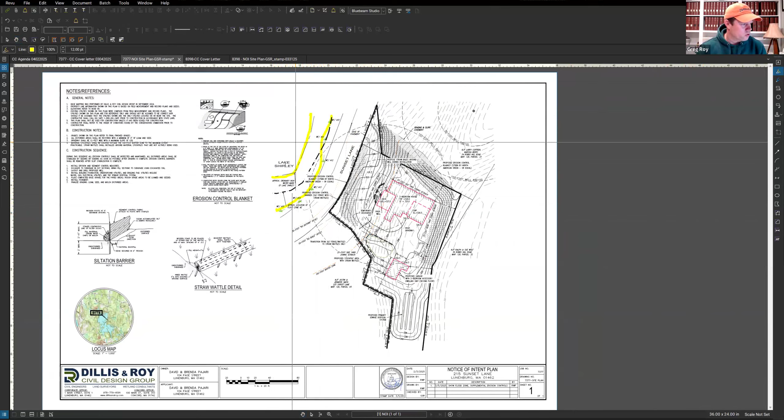Sunset Lane, of course, on this plan, is right in this area here, and the lake is on the left side of this page. So we have a wetland system flagged right in this area, and Lake Shirley is just past it over here. So that's the water, and then we have a bordering vegetated wetland that borders on the edge of the lake in this case.

The 30-foot no disturbance zone is located within the limits of the pavement, so there is no proposed work within that zone. The limit of the 50-foot no build zone is right here. So we have a very limited amount of work between the edge of the pavement and the 50-foot no build zone that's proposed. But essentially all of the work for this application is outside of the 50-foot no structure zone.

The limit of the 100-foot buffer zone is right in this location here. So the front portion of the site, approximately 50 feet of the site, is located within the 100-foot buffer zone. As you can see, most of the proposed structure, shown in red, is outside of the buffer. We do clip it with the front part of the house, a very small part of the front, and then a portion of the proposed deck. There's an accessory structure here shown, a garage structure, that's completely outside of the 100-foot buffer zone.

Essentially, this site needs to be lowered on the upper side where the proposed structures are going to be. So we're proposing a driveway that enters from Sunset Lane in this location right here, and then sort of skirts the slope so that we can get enough length required to keep the grade below the 12% maximum required by the town of Lunenburg's driveway regulations. Effectively, that is what's driving the grading at the site.

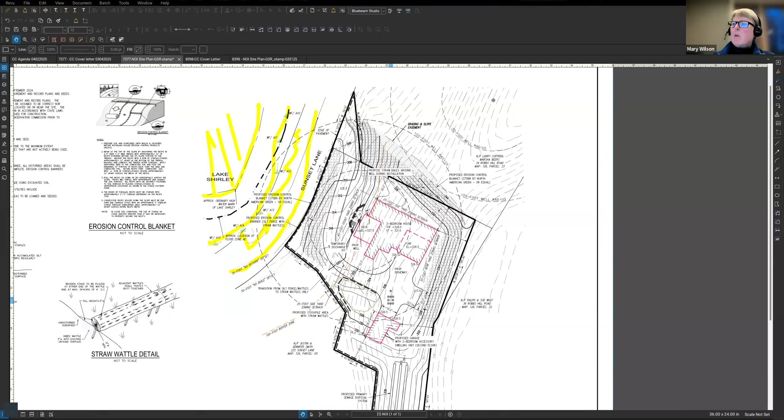It looks like maybe it's not. So, all of our notices of intent have figures in the back, and one of those figures is across the street, across from the abutting parcel, but not this parcel. I'm not sure if you're seeing the screen. Are you seeing it now? Yeah, with the notice of intent?

Yeah, so this is the natural heritage map. The site is in blue, and the yellow is the limit of the natural heritage area. So we are in fact outside of it. Okay.

Very good. I think there were two comments. I thought you were going to ask about the DEP, whether a DEP number had been issued, and in fact it has. The first comment was whether there were two applicants on the filing. There isn't. We've actually already put the A&R plan on record, so that land swap is already behind us. So there is in fact just one applicant. We believe that was proper.

And then the second comment was that they had a question about the floodplain. We have added that to the plans that we revised, on or about March 3rd, and showed it. It's on the opposite side of the street. There is no floodplain on the side of the street where the work will be done. So there's no work within bordering land subject to flooding.

Okay. And then with the grades, after this is completed, how will the property keep water from just sheeting off and into the road? Well, one thing I failed to mention, we are going to be restoring this with stake-down straw matting, so a little bit more beefy slope stabilization than we would normally do. But right now the entire property runs towards the road as it is. The current property is all covered with trees and understory, and this is gonna take a lot of that down, if not all of it. So if there's a concern with that, we could certainly look to put some dry wells in or something.

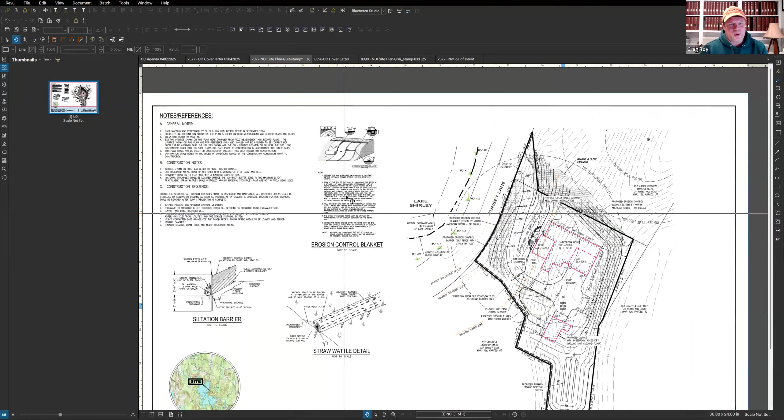We first of all did a more beefy slope stabilization specification on the plan than we normally would. We do have a rather basic construction sequence, but the intention would be to get those things stabilized as soon as they're built, and not let them sit there exposed. The good news is it's not a glacial till material here, it's a pretty granular sand.

So I'm not saying you're not going to get any washing, but you're not going to get the fines that come out of a glacial till material like you would in that type of material. So the intention would be to get those excavated and shaped and stabilized as fast as possible.

And we can memorialize that. Are the erosion mats impregnated with seed, or are you going to seed and then put the erosion mats over the top? Typically we would seed and then roll the mats and stake them down.

So you're going to loam over the sandy fill that's there? Right. Loam, seed, and then instead of mulch, in this case it would be the rolled, staked-down straw matting.

Okay, I guess I would recommend that we have a sequence where the slopes are loamed, seeded, and erosion matting put down as soon as the grade has been finalized and cut in, and the driveway is in use for construction.

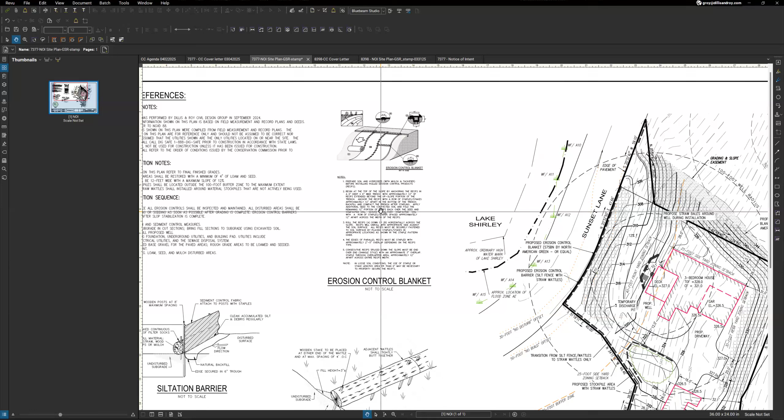So add the tracking strip at the end of the driveway and sequence that the slopes are loam seeded and the erosion protections put down as soon as the grade is done. That would be it, Madam Chair, at this point. Thank you very much, very good suggestions there.

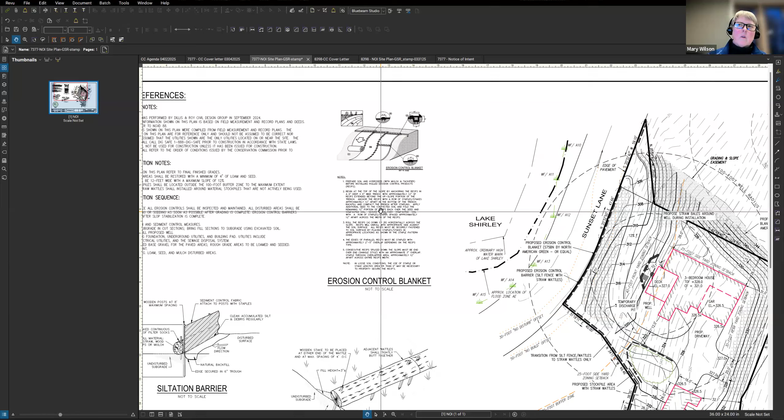Greg, I did ask if you could look at mitigating some mitigations for runoff. So would you be willing to continue to the next meeting? Would that give you enough time to go look at that for us? Yeah, that's plenty of time.

We can definitely, so I heard runoff mitigation, a tracking strip for vehicle tracking during construction, and updated construction sequencing to memorialize slope stabilization immediately after it's constructed. That's what I heard as well. Good news is you tape these meetings, so it's a lifesaver sometimes for us consultants to go back and look. We'll get those done.

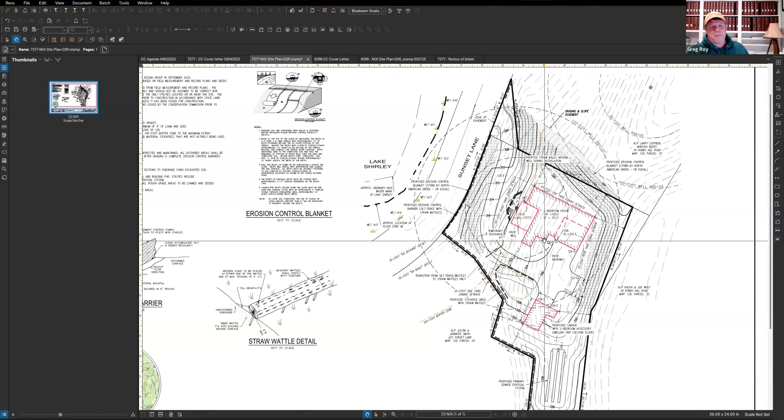There's a general condition that you folks have been putting in your orders relative to stormwater management and the preparation of a SWPP, compliance with the EPA NPDES permitting. The way it's phrased, it does not have the words 'if applicable,' it just says it has to be submitted. That's problematic on small sites like this where EPA SWPPs do not come into play. EPA SWPPs are only triggered if you have greater than 43,560 square feet, or greater than an acre, of land disturbance.

So I just keep that in mind for this. I feel like it's your purview to put whatever condition you want in a decision, but it seems to me like you need to put an 'if applicable' caveat on there, because there's projects we've run into recently where it's a small project that doesn't rise to the level of EPA SWPP permitting.

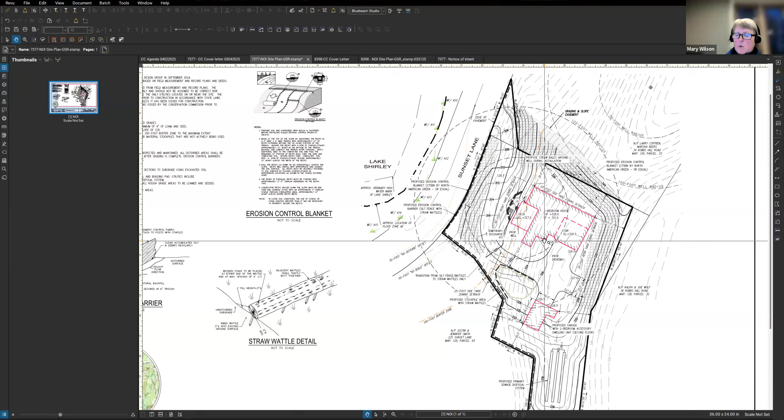I'll make a note of it, Greg. Thanks for the suggestion. It's always welcome. As you say, it's up to the commission about whether we take it on board or not, but I appreciate you offering it. There's always room to improve it everywhere, right?

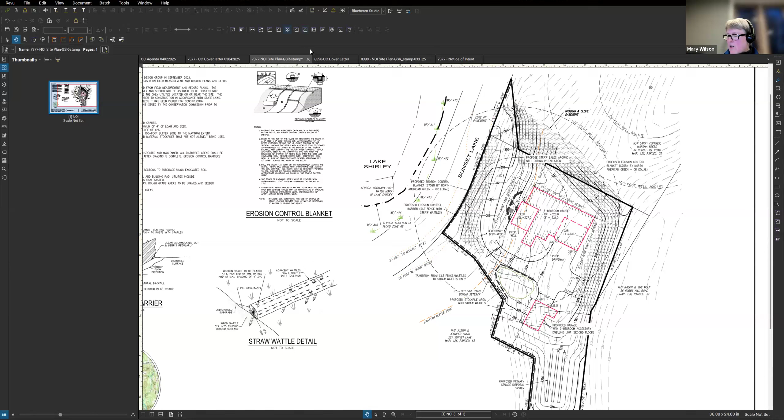So thank you. All right, now I'm looking for a motion to continue to April 16th. So moved. Second. Okay, I heard Rich and then I heard Mike as a second. Did I get that right? Sounds good. Okay, roll call vote.

Jenny, Aye. Rich, Aye. Jeff? Oh, I almost heard Jeff, but I don't think I did. Sorry about that, that's an aye. Thank you, Jeff. Mike, Aye. Chris, Aye. Pete, Aye. All right, thank you. See this one again on April 16th.

Moving along. Pursuant to Mass General Law, Chapter 131, Section 40 as amended in the Town of Lunenburg Wetlands Protection and Municipal Bylaws, a public hearing on a notice of intent by Proctor Mass Ave Realty Trust for the extension of an existing paved driveway, the construction of a single-family dwelling, and the removal of vegetation within the 100, 50, and 30-foot wetland buffer at 1523 Mass Ave.

And do we have the applicant and/or the representative here with us tonight? Madam Chair, Greg Roy with Dillis & Roy. I'm representing the applicant this evening, which is the Proctor family. Dan Proctor, I think, is on the call, perhaps Gene as well. Officially, it's Proctor Mass Ave Realty Trust.

This property is located on Mass Ave, on the northerly side of Mass Ave, and it's directly adjacent to the large wetland system out back, within the Cowdery conservation area. So if you familiarize yourself, when you come around the big bend coming out of town, you go down that low point and cross the big wetland area. Just before that, on the left, is the land area we're talking about.

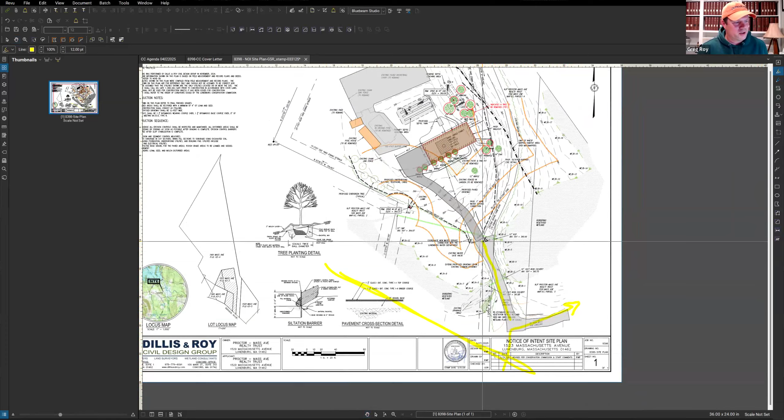So Mass Ave is actually down here off the page, a little bit further. The driveway comes in here, splits off to the existing house that Dan and Jean live in. There's an existing driveway, shown in light gray, that's constructed today. It opens up into a field area on the lot we're talking about, where there's an existing pool, basketball court, and in front of that is where we're proposing to build and construct the new house.

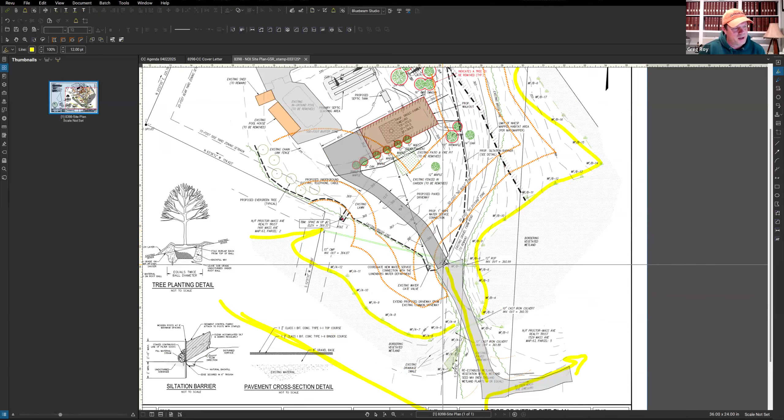So there are wetland resource areas on a couple of sides here, and on the other side here as well. The orange lines represent the 30, 50, and 100-foot buffer zones on the site. So with the exception of the connection of the driveway to the existing driveway, which is slightly within the 30-foot no-touch zone, there's no work proposed within the 30-foot no-touch zone.

Again, the only way to access it is through that point. The rest of the driveway from this point on is outside of the 50-foot no-touch zone or no-structure zone, and the house is almost completely out of the buffer zone, certainly outside of the 50-foot zone.

The only other exception I wanted to note is that, as I mentioned, there was an existing house here. So there's a water stub that comes in, and an existing water valve right in this location. We're proposing to connect the water line from that point, so that would be our utility connection. You can see we have the erosion control barrier run right around the limits of that, so we can accommodate that connection.

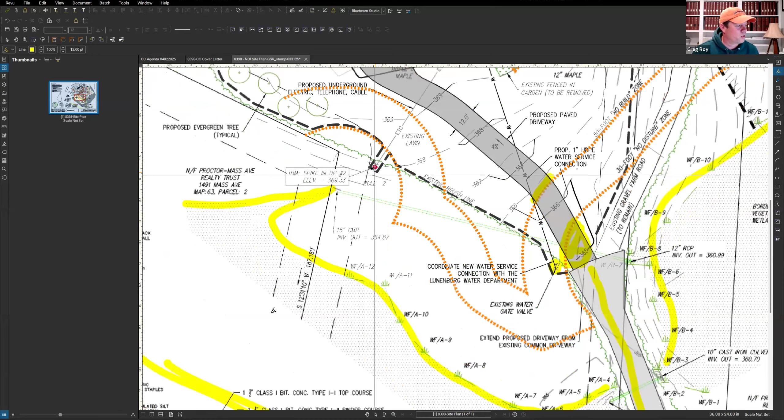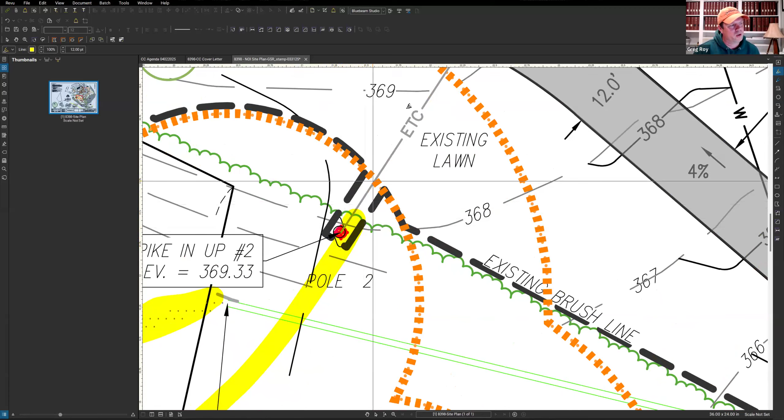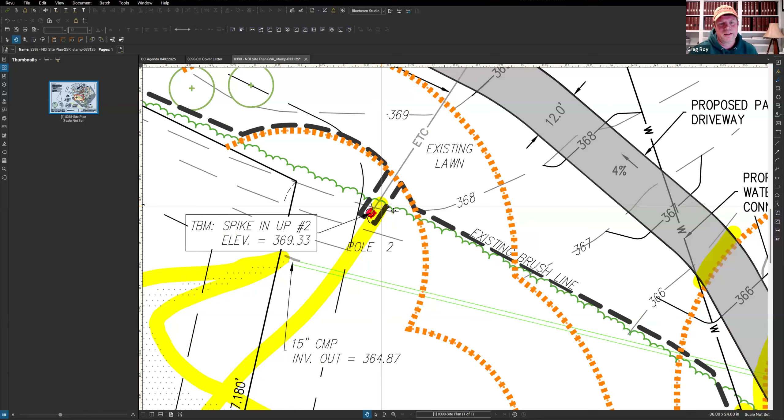And in this location, you can see this red dot - that's an existing utility pole. The power lines come cross country from Mass Ave, kind of like this, to this pole. We will need to connect to that pole, and the intention is to do that underground. So there will be a short period of excavation needed here to get from the pole into the site for the permanent power connection. That is within the 30-foot buffer zone, but it looks a little deceiving here - that pole is right at the edge of the woods line. There's no tree removal required for that connection. It's completely out in the limit of the lawn area.

There were some comments that we got from both the site walk. I attended a site walk with Sophie, I think a week ago, and then I think Ryan was on site with a few members of the commission on Saturday. Two things came as a result of that.

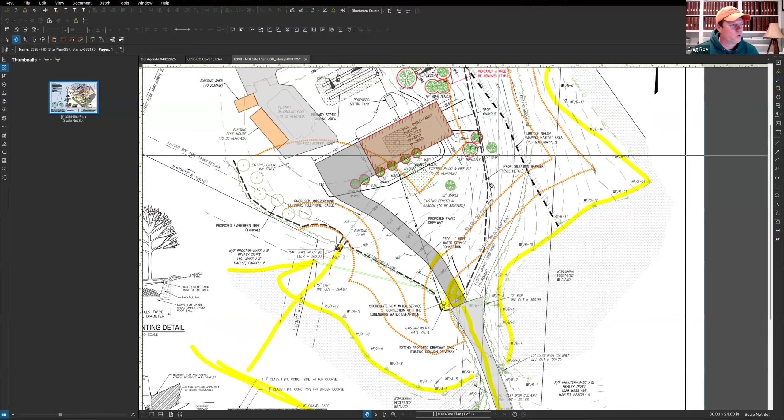One was that we had not shown all of the trees that were going to be removed on the property. We had shown the ones in the back here, most of which are actually outside of the buffer zone, but there's two down here that are within the 100-foot. We didn't show the ones along the edge of the fence that encloses the pool - there's about 6 trees right in this area, along the fence, that are going to have to come down because they're in the location of where the house and driveway are proposed.

All of those trees are outside of the 50-foot. 3 of them are outside of the 100-foot. So, we wanted to be clear and show those on there.

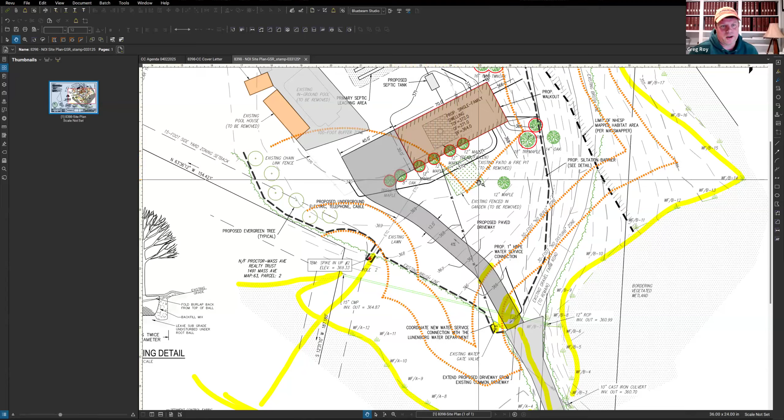The only other thing that came to light was that there's a pocket of wetlands down here that have been disturbed. This is essentially, I think historically, a drainage swale that was built a long time ago that drains - takes drainage from Mass Ave - and then drains to a culvert in here. Over time, the culvert gets kind of gummed up and needs maintenance. So I think the disturbance here was related to that.

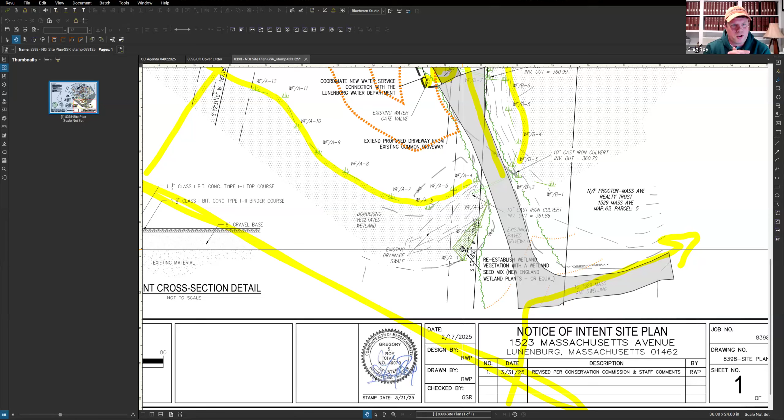And the applicant has committed to restoring that area. I think that was discussed on site. We have memorialized that on this plan, where we will dress that area up and overseed that with a wetland seed mix. We also issued a letter to that effect too. So those were the 2 items.

Septic system is going in the back of the house, outside of the buffer zone, so no issues with that. I think that's all for this one. We did receive a DEP file number on this one as well, and there were no comments from DEP on this one. So I think that is all I wanted to mention.

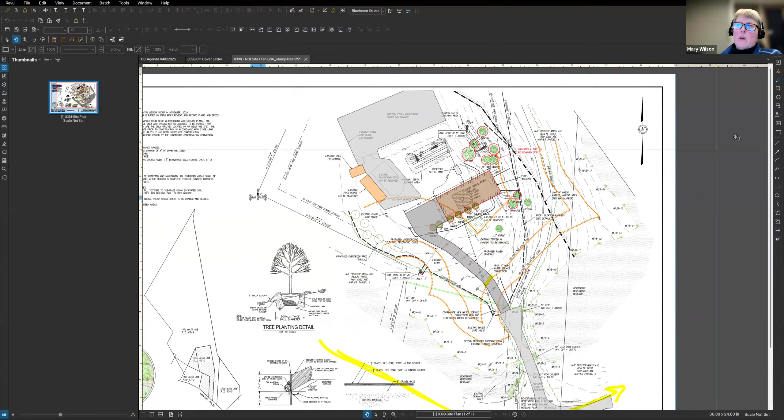Thank you, Greg. So there is NHESP protected area on this, not in any of the areas where you're planning to do construction. But my understanding is that if it touches the parcel that you're doing work with, that's correct - you have to send the letter to Mass NHESP and get them to agree that you're not altering or impacting that area.

Which hopefully would be something really straightforward to send to them, and they would send you back a letter saying, oh no, this doesn't apply. So typically we would not do that if we're outside the polygon.

We're either in it or out. So just so everybody knows, the limit of the natural heritage is right here, and it's back this way. I think typically all of that makes sense, but we had a project on Arbor Street, and that was the advice we got from NHESP.

Now, if they come back and say, oh no, your Conservation Commission got it wrong, just let me know and we'll adapt and move on. But I can only go by my understanding of what they've told us.

Typically, the only way we proceed is we're either in the polygon or not. If we're not in the polygon with any work, we wouldn't send them anything. If we're within it, we'd file a formal MESA application or a joint notice of intent application, or if we're claiming an exemption, we'd send them a letter citing the CMR regulation for the MESA exemption and ask them to confirm it. But we typically would not do that if we're clearly outside the polygon.

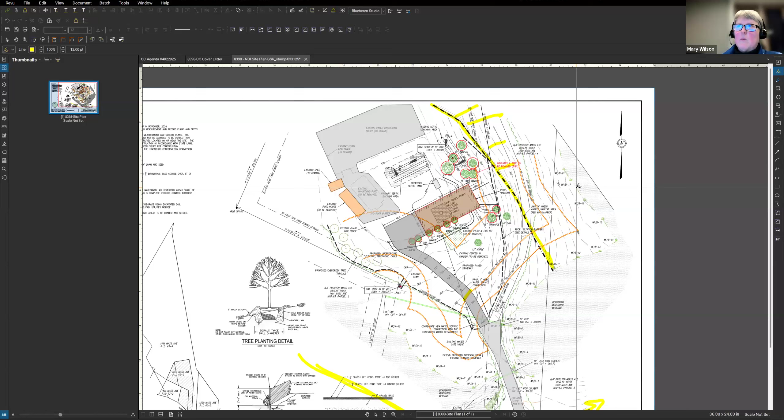So, any other questions or comments about this project by other members of the commission? Jenny: I don't know if I missed this, I was trying to go through some of the notes from Sophie. Did you say what's going to happen to the debris from the pool when that's removed?

Yeah, so presently, you can see here, it's to be removed. Presently, he's planning on pulling all that out and filling it in, so he's not intending to keep the pool. I'm not sure what type of pool it is. Danny's on the call, I don't know if Danny has any details.

Yeah, so it's a vinyl liner pool, concrete. Typically, whenever you do a pool demo project, you pull a demo permit with the building department. All the concrete needs to be brought to a concrete disposal yard, such as Keating's or something like that. You remove the vinyl liner with typical rubbish removal. Then once the hole is clean of all that, the building inspector gives you the okay to fill it with clean sand fill. That's typically what happens with a pool removal.

And we'll probably use the spoils from the foundation hole to do that. It's pretty good material here, pretty sandy, so we have good granular material here too. Okay, any other questions or comments?

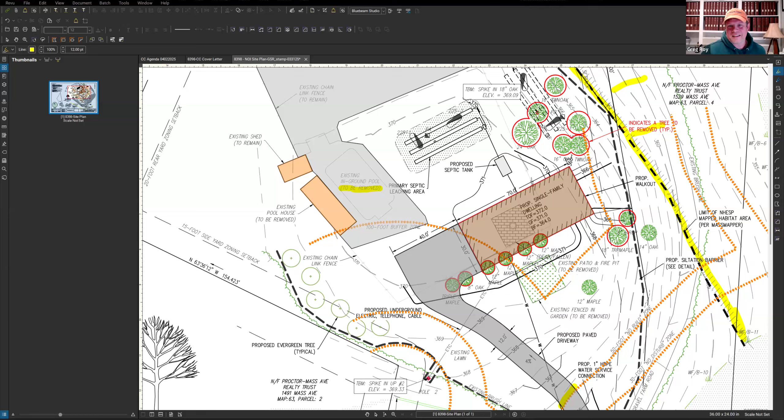Yeah, I can tell you what it is, I can read it for you. Hold on one second, Ryan was kind enough to forward it to me. It'd be even easier and better if you read it but also told us what the number reference was. It's condition... sorry, I lost it. Hold on, I got too many windows open. I gotta stop share, hold on one second.

So it's condition, at least in the order he's referencing here, and I'm not sure which one it is, but it was condition 41 under the heading stormwater management. The condition reads: there shall be no direct discharge of runoff into streams or wetlands. Runoff from the site shall be directed overland to maximize groundwater recharge and cleansing of the runoff through contact with natural soils and vegetation. Discharge from the detention basin shall be at least 30 feet from any wetland resource area.

We don't object to any of that, so if you wanted to keep that in, that would be fine. It's the next sentences that are problematic, because it says the following documentation shall be submitted: NPDES permits shall be submitted to file, copies of the SWPPP reports filed, and reports of maintenance of stormwater systems for every phase shall be submitted yearly. So those three things can't be done on a site like this because the SWPPP doesn't apply.

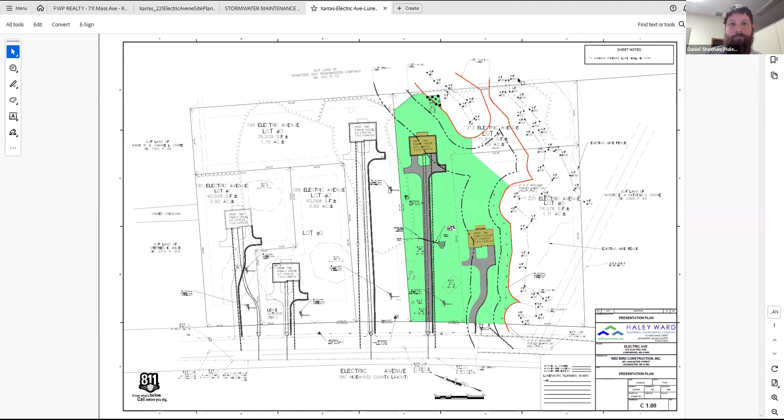Do you guys like a presentation for some of that stuff? This is for a de minimis change. I just want to know if I should stay on the call. Yeah, it'd be helpful since we don't have Sophie here, if you don't mind. Yeah, absolutely, that's totally fine. Thanks for offering. Not a problem.

Okay, moving along. Here we have a couple that we are tracking. 10 Sandy Cove Road, that's an administrative determination.

I don't know if we have the information we need to discuss that with Sophie not being here today. Jenny, you were looking at Sophie's notes for us, does she have any notes about this we can work off of? So I actually dropped the ball on this one and should have put it on our site walks this weekend, but I did not. Let me see what the notes are. We don't typically go on site walks for administrative determinations.

Okay, just so you know, Sophie had assigned it to me. But I mean, that's what administrative determination means, it's her determination. Doesn't mean we can't, but unless there's something unusual she particularly wanted us to look at, it's not usually the assumption that we're going to go do those.

Okay, let's see. So in her notes, this proposed cutting of upper portions of 13 trees, excluding snag tree along the edge of the property, agree to add plantings as replacement, including various spruce species and arborvitaes. Agree to remove upper half and leave 5 feet for wildlife habitat. Main concern is clearance for residential utility lines only. Also advise that limbing is also an option for utility clearance.

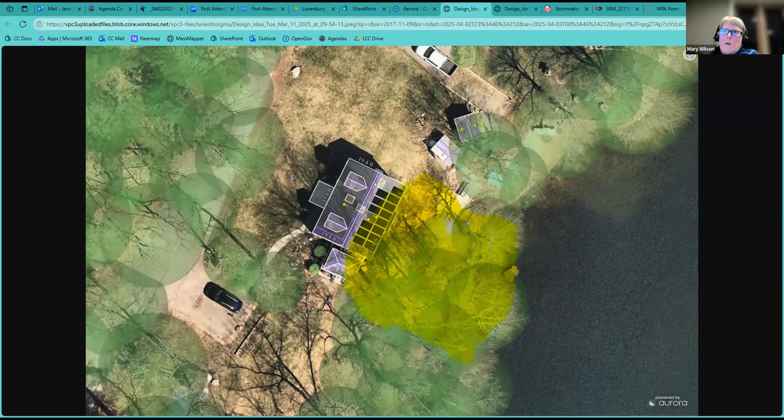Do you want to share that with us? Do you have the ability to do that? I should. Maybe. Okay, can you see this? Do we have the applicant here with us tonight? I'm not seeing anybody raise their hand.

Can you see the diagram or can you only see the record? I can see the house and the satellite image, so sort of. This is a diagram showing location of proposed work relative to the wetlands. Does it show that? I don't feel like it does. No, I guess there's some feet, 13.9 feet, 35 — it looks like it's more just house dimensions. Let's see what else we have for attachments.

We have some photos that Sophie had uploaded. Can you see this? I can. I think we might have to wait for Sophie on this one. But also it doesn't look like the applicant uploaded the requested planting diagram.

So I think we need to continue this. It also doesn't look like there's a diagram showing where the work is going to be relative to the wetland either. So all we have is some pictures and the proposed work diagram that doesn't appear to be what we're looking for.

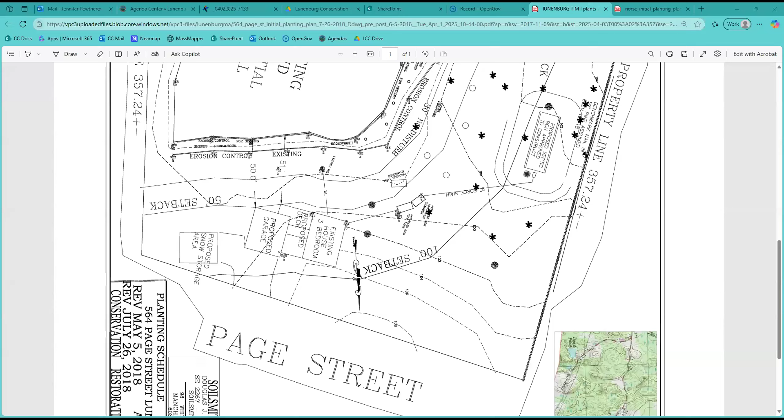Hi Jenny, you have your hand up — put it up on my screen if you'd like me to share it. Okay, super. Can we see it? All right, hold on, let me make it make sense. There we go, rotate it. Nice, all right, so this is the legend.

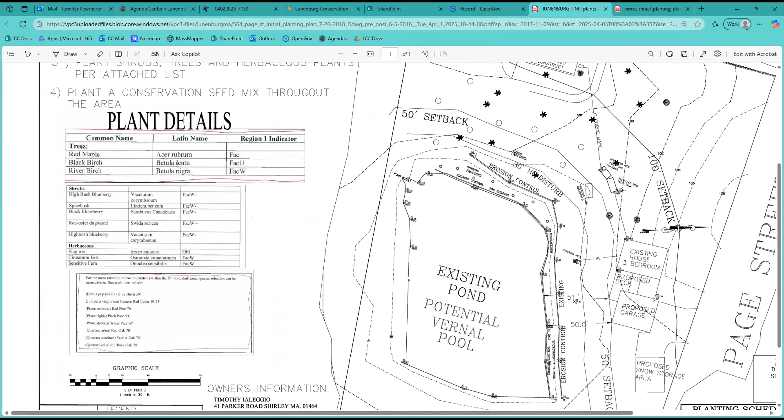These are some of the plants that were called out. And then this is the plan.

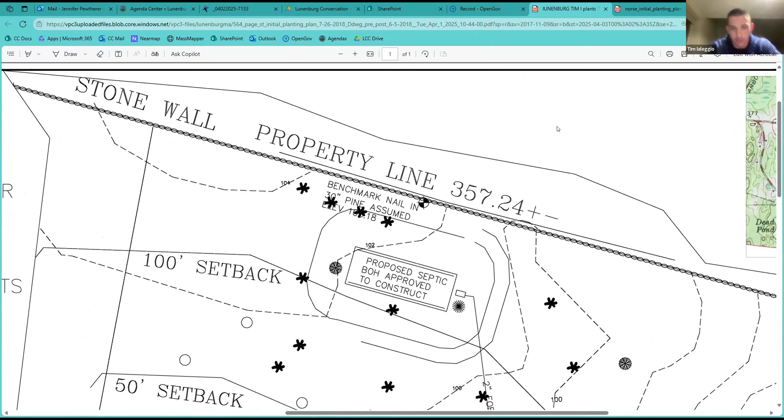This is what we're looking for, right? If you scroll more up, keep going. Yeah, so these trees with the bushes here, like this is indicating — no, the circles are where it's supposed to go. The open circles, the hollows, that's proposed trees, and the proposed shrubs are inside of that.

If you were to look at the plan that Greg Roy submitted, it's the same.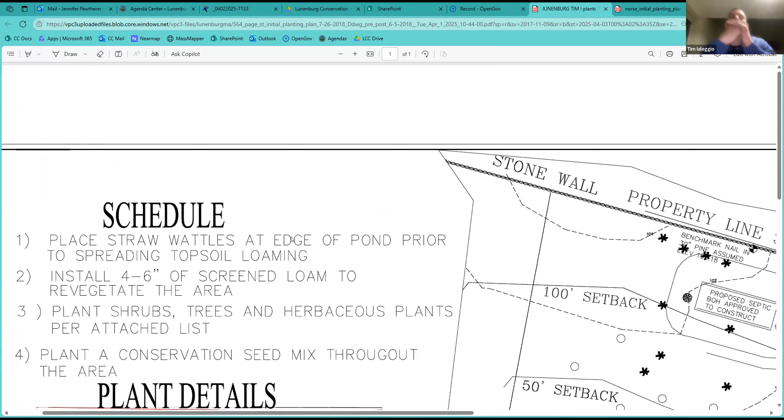We're missing a page, but so the trees, the open circles are supposed to be trees, the proposed replantings. The stars are trees removed that were there before. Okay, and then these are shrubs?

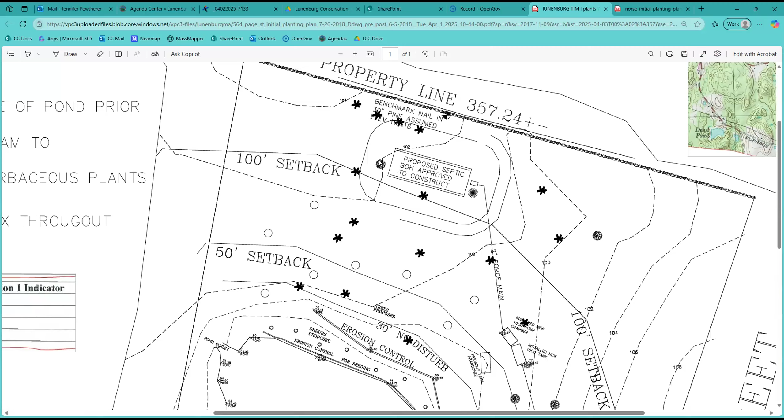You'd have to refer to the legend. I think that indicates a red oak that was taken down for the septic. I'm not 100% sure, there's a legend at the bottom. Yeah, keep going left. Yeah, it doesn't have it. The legend is all utilities.

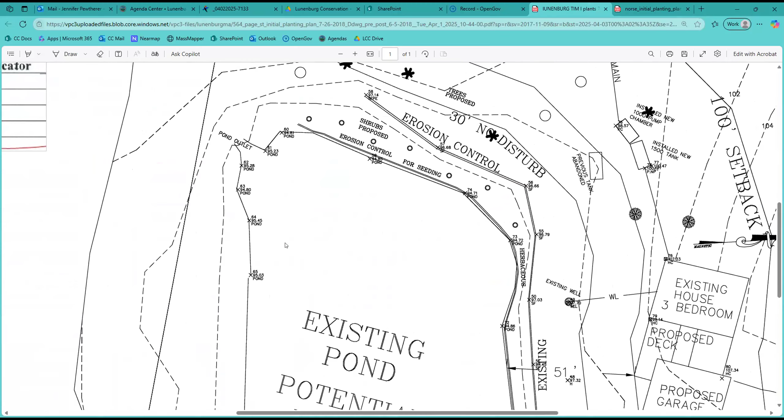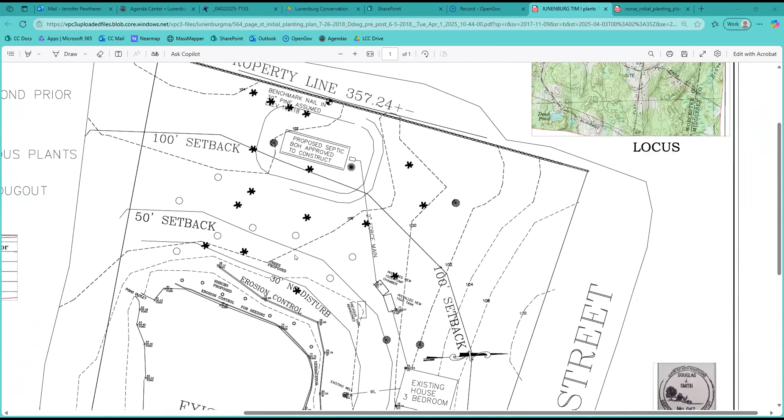So it says here, plant shrubs, trees and herbaceous plants per attached list. And then we have a list, but we don't have a legend for these. But typically this would be some sort of a vegetation — and I mean, one, those are outside 100 feet.

If you look where it says trees proposed and shrubs proposed, they have the little circles, and the trees proposed is the big circles. I don't know if there's another page that was supposed to be uploaded as well, but if you go up to the top of the page, it shows a little bit more.

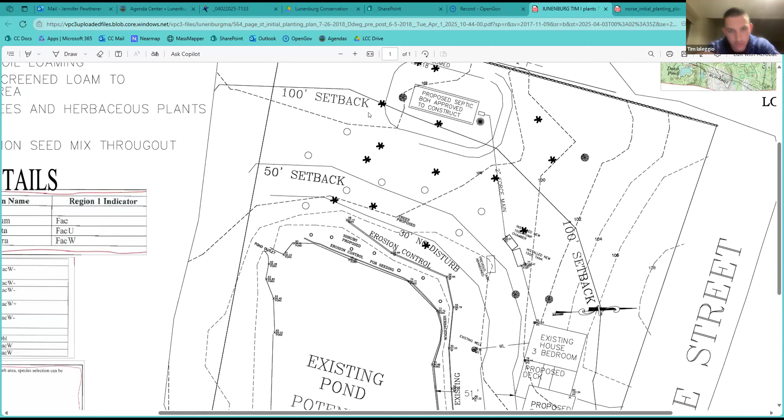Is there another one of these that's there as well? No, it's just this one page.

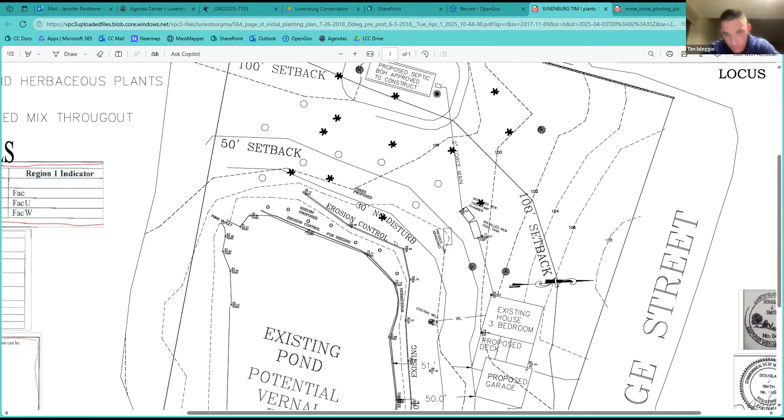So if you count the little circles that are the proposed shrubs, and count the big circles that are proposed trees, you come up with 15. The as-built submitted by Dillis and Roy has 11. And the Norse initial inspection report showed 17. So there's a discrepancy here.

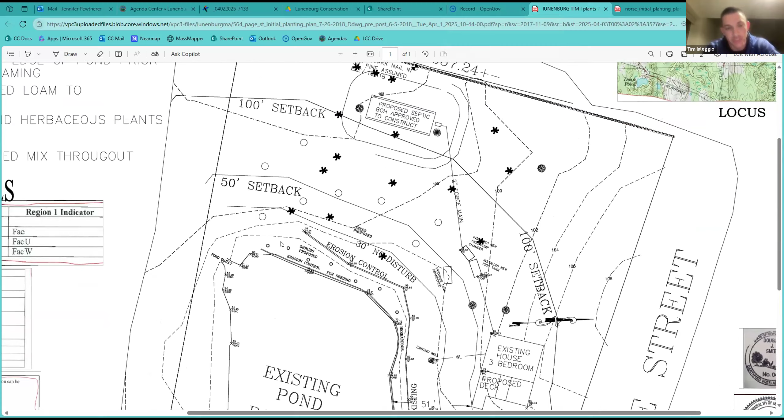Well, the ones that are closest are far overgrown. Those are the ones indicated on the Norse plan. I mean, this was 7 years ago. They're the ones closest to the existing pond that Norse indicates are there, completely overgrown by the wetland. The wetland has taken over.

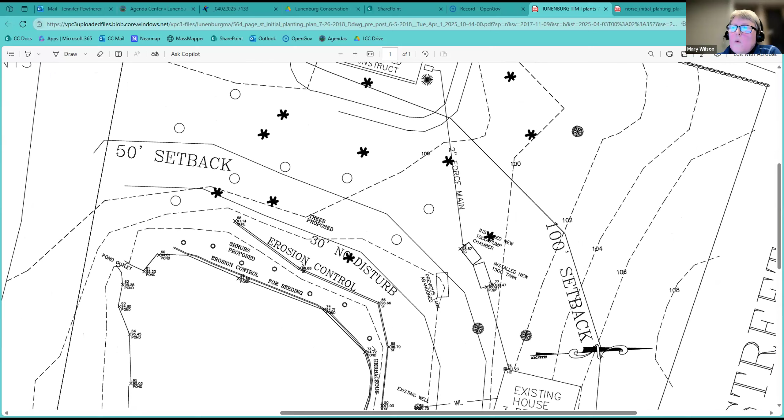Norse indicates in 2021 that they're there, but now in 2025 they're completely gone. Oh, well what they said in their 2021 report was that there were 17 plantings that had been planted in September. They did that planting in September 2021, and did their inspection in December of that same year. So they basically said it looks like they were planted and doing okay for being in dormant conditions. But they did detail in their schedule 17 plantings.

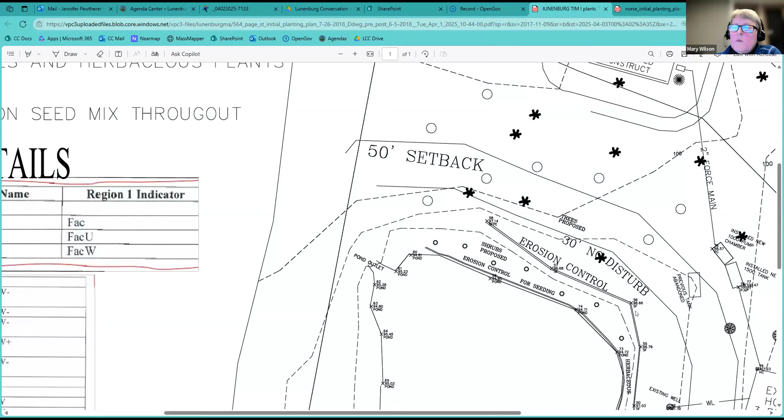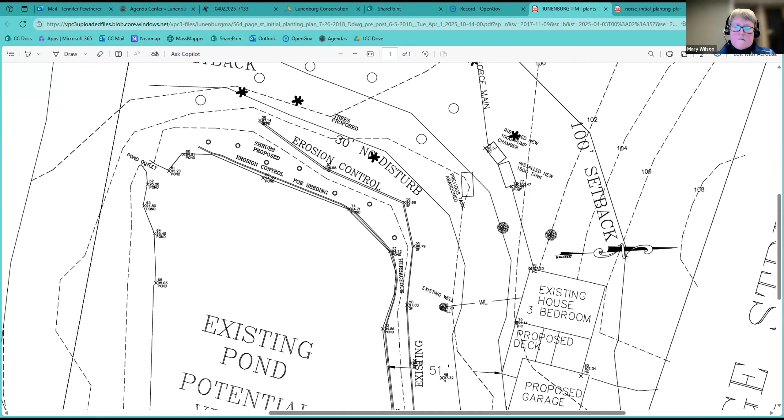I'm not sure. I'm not sure what you're looking for. Good, do you want me to pull that up, Mary? Sure, okay. Seeing it in the... I have it somewhere though.

While you're looking for that, Jenny, I just want to say this application has caused us concern when it was before us, because it started out as a violation. It had a condition on it for a wetland scientist to monitor it throughout, and it looks like that was not followed. Where's that condition? Number 45? No, for the restoration area.

And then when the certificate of compliance was requested this summer, and Sophia went out and did an inspection, there were dead trees that were painted green and leaves taped onto those dead trees. So there's a lot of reason for concern about actually being dedicated to the wetland area, the protected resource area, and ensuring those plants are there and thrive and continue to thrive.

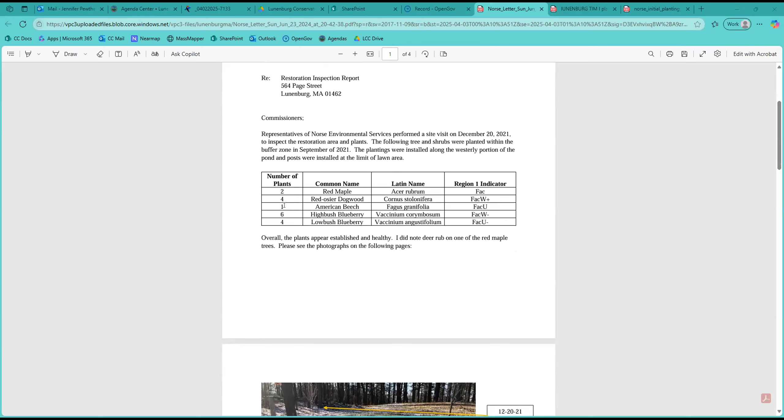I see 17 replantings in this Norse report. Am I counting it right? Yeah, 6, 7, 13, 17. Yes, okay, so that was what was there when Norse did the inspection in 2021. But somehow that's been reduced to 11 now.

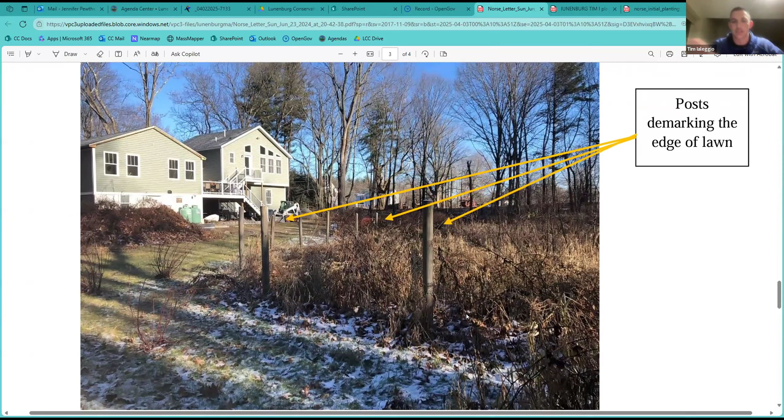Well, that's because the 6 closest to the wetland are truly taken over. They're gone, under weeds or whatever wetland-type plants are in there. Low bush blueberries and things of that nature. Your wetland scientist should be able to find them, right, or justify that they don't need to be there because the wetland has sufficiently been restored.

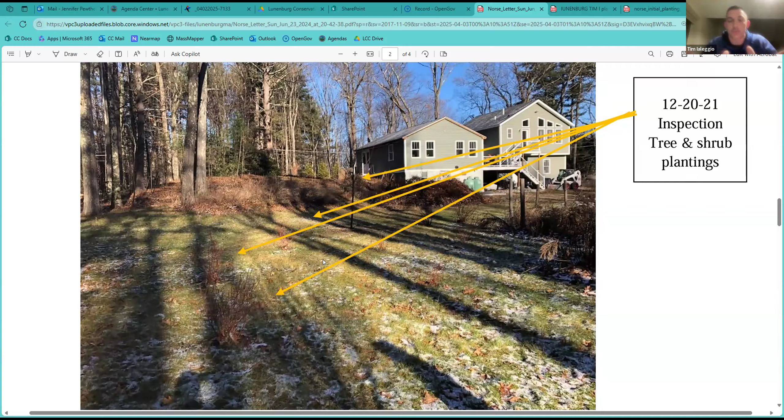Ma'am, the 45 and the 26 are boilerplate, and looking at the order of conditions, it's not applicable. Can your commission please vote on the fact that 2 linear feet to the actual wetland resource area is not work within the wetland resource area? I didn't come up with it, you guys voted on it. Those are the numbers, that's the universe I'm in right now.

Jenny, you have your hand up. So, I mean, look, I think a big concern for me is that looking at this, these plants should be much bigger now, and it appears that none of these plants survived. Very few of these plants have survived, and we're talking 4 years later.

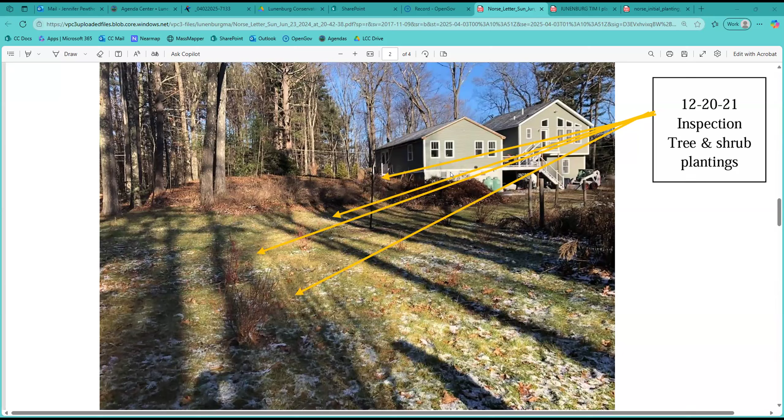So it's hard for me to think that if this is what's happened in the last 4 years, and we're still looking at plants that really should be very established at this point, because the original planting plan was in 2018. So we should be about 6 years out from the initial planting. This should be very established. It's hard to say, okay, well now we can see that it looks like whomever has really put a lot of thought into what's planted there now. But how do we know that that's going to stay established if we're 6 years later and we don't have very much to show for what was originally designed?

Okay, thank you, Jenny. If you're looking for a letter, I will get a letter. That's what I personally am looking for. I'm looking for a letter from wetland scientists that says this replanting matches what was approved by the Conservation Commission, and that they agree the restoration is complete and the plants are established.

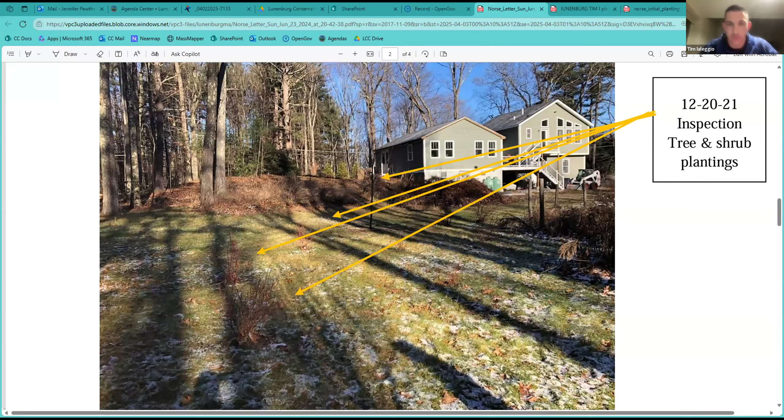That's what I am looking for. Is the commission in agreement that this is actually work within a wetland resource area? Is the commission truly in agreement? Has a vote been taken on that? Because the actual language in that document states otherwise.

Truly, yeah, so I can ask that question. Just for the commission to recall, I did speak to Matt Morrow about this, and Matt's advice, consistent with what is in the original NOI, is that this restoration work is in the resource area and therefore qualifies as a restoration project, and that conveys upon the protections that were cited for wetland replication. But I'm happy to hear from the commission on this.

Jenny, you have your hand up. Condition 45 is actually a special condition that was put in this order of conditions specifically because this is a replication. That wouldn't typically be there for an order of conditions — it's only added for this type of circumstance. That leads me to believe this is definitely meant to be this, but if there's work in the wetlands and the order of conditions says there isn't.

I didn't — it's conveyed as restoration, and that's the language we use for restoration. But if it was buffer zone impact only, there would be no caveat, because by state law, town bylaw, and wetland regulation, the buffer zones are not resource areas. It says work within resource areas counts as work within wetlands. That's literally what it says. Resource areas and wetlands are synonyms in the regulations.

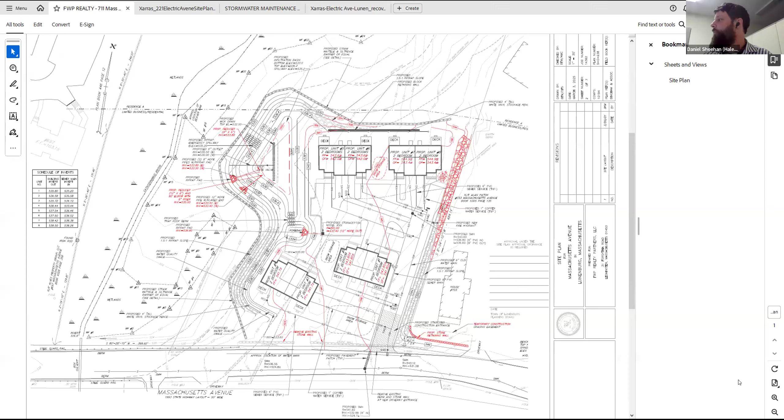I'm going to try to zoom in here - it's going to keep popping up. It was originally tied in on this side, which would actually allow flow into the garage, which we wouldn't want. So we actually relocated that outside of that. And besides that was a lot of the stormwater changes.

Again, some high level stuff here - the biggest thing was the outlets here were placed a little bit lower. So to help mitigate and maintain those same stormwater standards, we're proposing to have reducers installed for some of these. One of the outlet pipes is going to have an 8x6 reducer on it, and the other one is a 12x8 reducer, but it also has like an elbow, so a riser for it. That's just to mitigate all those flows that originally were getting sent out because these were placed lower, just to make sure we're still in compliance with those Mass DEP stormwater standards.

And that is - yep, go ahead. Daniel, just educate me on this - I'm an electrical engineer, not a civil engineer. Sure. How does the reducer mitigate the lower position?

Yeah, absolutely. So the biggest thing here is with the larger orifice, you can allow a lot more water flow to come through it. With these smaller orifices, you're kind of constricting that flow. So essentially you end up with what they call a barrel block situation, where you're only allowing a certain amount of flow to come through, and it allows the water to build up. The issue with those larger diameters on the lower end is that as that water builds up, it starts to push the water through the pipes a bit faster. So you give a constrainer on that to choke down that flow and keep it at a steady pace.

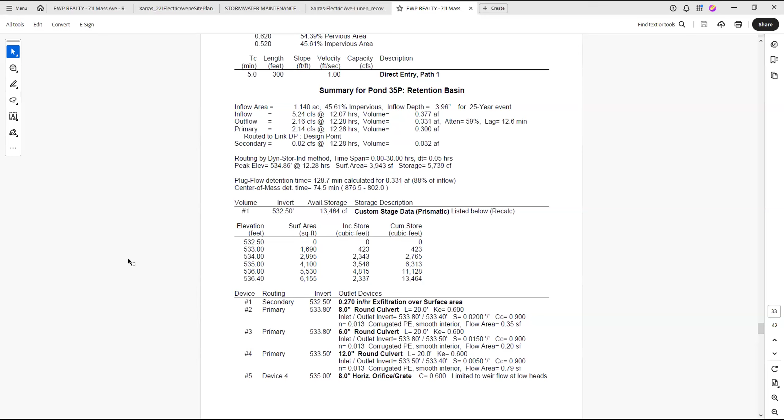Oh, I see OpenGov. So it is, I was seeing it in OpenGov. It's gotta be, yeah, you found it this weekend though, because you were walking me and Pete through it. Why can't I find it now? It was the only thing that showed up when I was looking for it before. I imagine your end's a little bit different than mine.

I can also take a look at OpenGov on my end as well, see if I can find anything for you. But while you guys are still searching for that, I guess I can do this little educational purpose as far as Pete here.

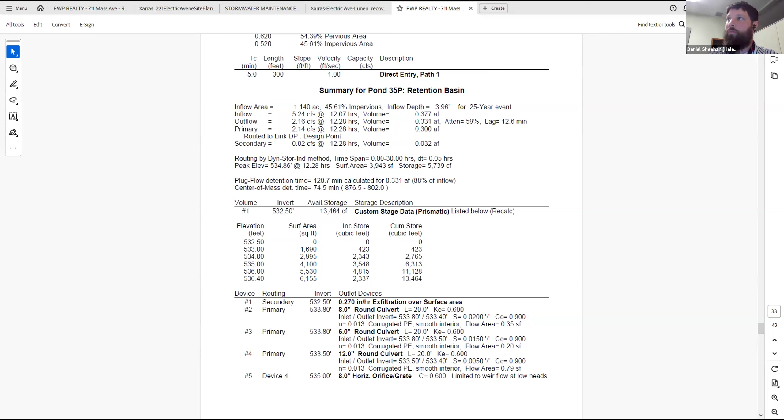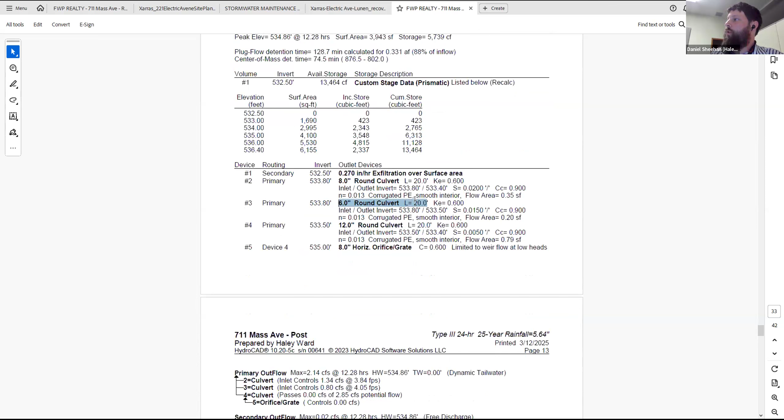So normally what you do is you look at the 25-year storm event, and we made sure that we stayed relative to what was originally approved back in the day. So this here is Pond 35P, which is that retention basin that is being modified. And what we show here is the 6-inch round culvert kind of being that constricting factor. And if I can find it, normally they do show velocity coming out of it as well.

Yeah, okay, here we go. So again, just for the educational purposes, this is device number 3. So down here on the primary outfall, it'll be labeled as number 3. And it shows here inlet controls 0.8 CFS at 4.05 feet per second. And then similarly with the other ones here as well, inlet 2, that 8-inch, that's not going to have that reducer on it.

Got up to 3.84, but allowed a lot more flow out. So it's, again, not at a velocity that's, I would say, concerning with reaching that 12 feet per second, but it just allows a lot more flow to come out of this. And that was kind of more of the issue here in this case. But to your point, velocity is a concern, so we would want to keep that in mind as well. So Pete, that's an astute question as well.

I see Jenny with her hand up, so I'll stop talking here. Jenny? I found it. It was under LT4, so I guess unit 4. So let me share. Okay, Lot 4, yep, that makes sense. Okay.

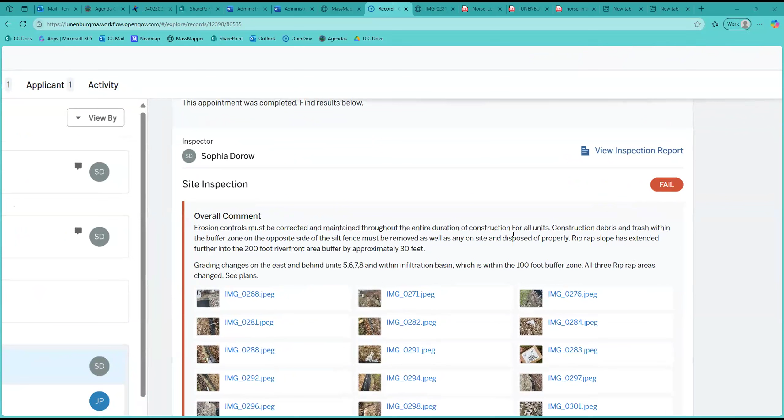All right, can we see this? Yep. So erosion controls must be corrected and maintained throughout the entire duration of construction for all units. Construction debris and trash within the buffer zone on the opposite side of the silt fence must be removed, as well as any on-site and disposed of properly. Riprap slope has extended further into the 200-foot riverfront area buffer by approximately 30 feet. Grading changes on the east end behind units 5, 6, 7, and 8, and within an infiltration basin, which is within the 100-foot buffer zone. All 3 riprap areas changed, see plans. And then she has some pictures that we took a look at while we were there.

Let's see if there's, I can go through all of them, like this. And then I also had a concern with some erosion to the side of the lot that hasn't been, that just has the foundation, which I have some pictures of that too. I can go through Sophie's pictures.

I think that actually might be downslope of where my concern is. Rightfully so, absolutely. I think that's right underneath where we saw that washout.

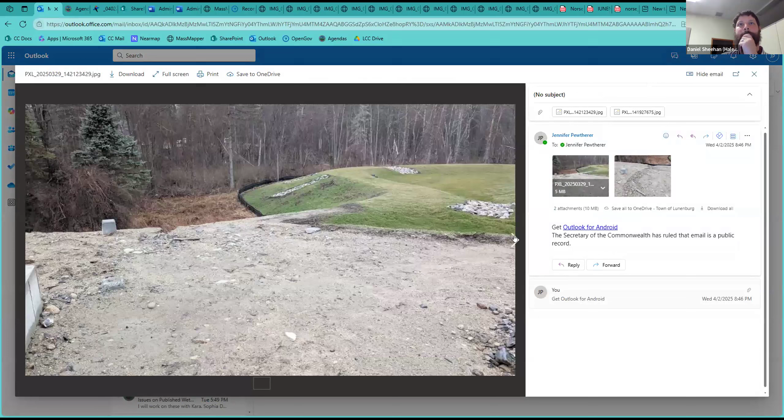Yeah, so I have some, can you see my screen here? Can you see these pictures? Yep. So right here we have a washout. This is a better picture. Okay, and I would like to, I think, to see this water - this being, you see my mouse maybe going that way - into some of, there's a basin or forebay there. Yep, absolutely.

So I guess to hopefully answer some of these questions, and Jenny, I apologize if I cut you off there. But so this site is still under construction. So I guess the purpose of kind of showing this plan, because my understanding is how this all kind of came up was what was originally submitted was as-built plans to the planning board, because they're looking to get some units closed out so they can sell it, so they can continue construction. So for those lots that are still not fully constructed, obviously they would still need to have a lot more work with it.

I'm actually going to share my screen here as well, just to point out one thing to Jenny's point here, which is actually very critical as well.

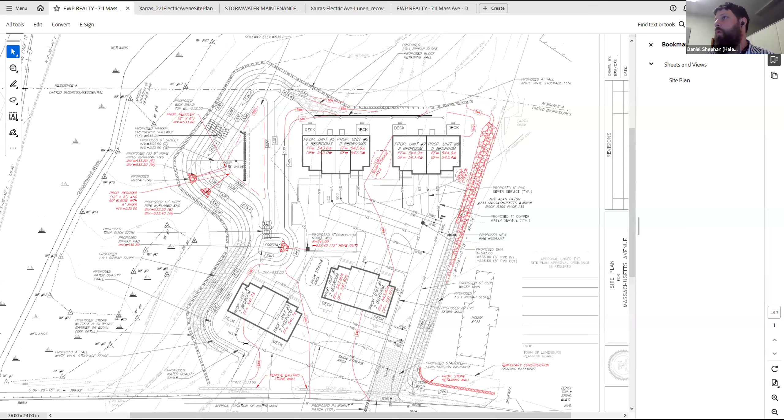So what isn't constructed yet around these units, this is actually a water quality swale. That's supposed to pick up a lot of that runoff that's currently being shed across towards the erosion control barriers, and kind of pick it up and send it into the sediment forebay.

The sediment forebay, as of right now, I will say it's doing its job in quotations because it is full of sediment. It is currently undersized just because of how it's currently behaving with that area not being stabilized yet. So all of that is still proposed, and all those things would still need to get done.

It just really comes down to, from a construction standpoint, he needs to get some of the money released from his lender to continue construction on those other lots. But I'm in complete agreement that sediment washout really needs to be taken care of, and that erosion needs to be rectified, to say the least. But when it's all said and done, it should still all be pitched into this forebay, especially with this water quality swale.

I hope that maybe answers some of your questions. I'd be more than happy to go into more detail if needed, but just want to make sure I'm answering and not going above the call of duty.

To answer the question in my mind, Jenny, you're on mute. It answered the question, and I would like to see what's happening now taken care of, but yeah, it answers the question in my mind too.

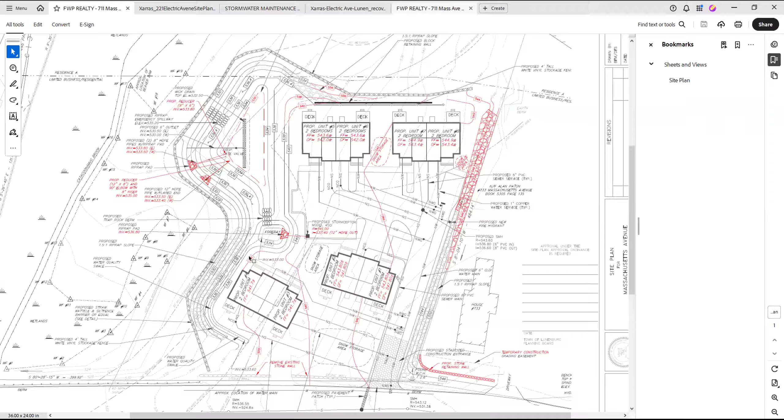So right now, well, I couldn't tell from the picture that Sophie had taken. Is the downslope, because I couldn't go down there because of my leg, where all of the sedimentation that we saw deposited, let me pull up that picture again and I'll share my screen again.

Honestly, I also have some photos too as well from when the as-built was done, but this was a while back. So this one, is this downslope of where my picture was?

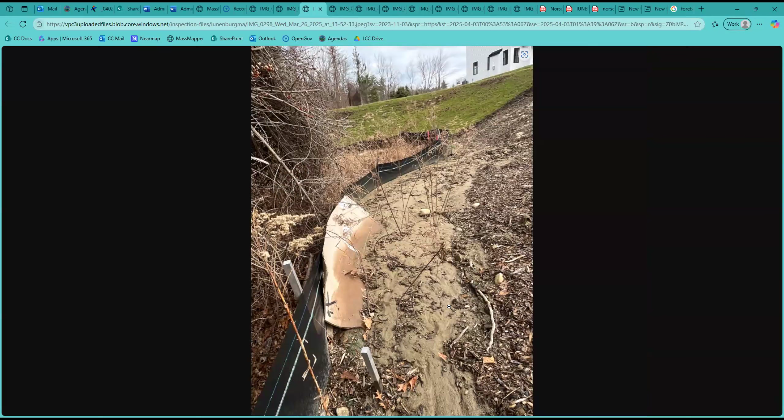Yes, it sure looks like it, because that grass along the side there is pretty much right at the edge of that basin, if you will, that's been currently constructed. So it's almost like right where that sediment forebay should be. Based on what I can tell, it looks like that washout...

Maybe if you move the cursor a little to the right there, Jenny, a little bit more up and to the right. I think that washout right there, that's probably the stones that you saw, and it's kind of making its way down to the lowest point, so that all that silt is just running off from whatever was gouged out by some rainstorm and piling at this low point here.

So my thinking is that if that continues, this barrier is not going to hold up. I absolutely agree. What we do to maybe have some sort of barrier that's directing it the other way - I don't know what the best practice for that would be, but this definitely doesn't look like it has much left to hold it. So I would like to see this prevented so that this doesn't end up breaking.

Yeah, absolutely. So I can speak a little bit on BMPs. The best management practice for something like this would just be a diversion trench, which is essentially just grabbing the excavator, digging let's just say a 2 foot, 4 foot wide trench, whatever they have on site, and directing it towards that sediment forebay where it should be collecting.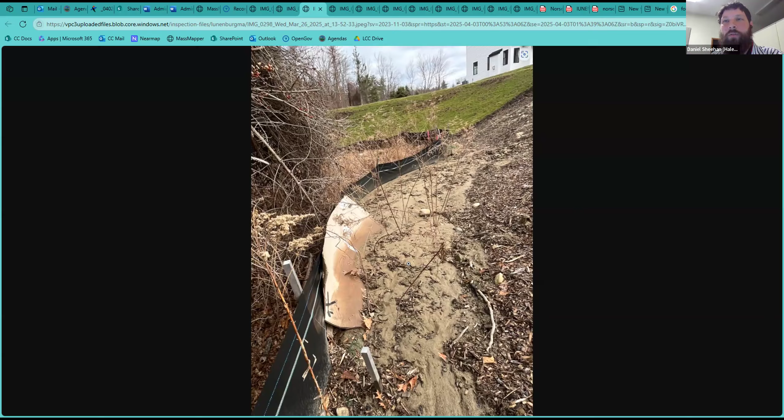Based on the photo, you can kind of see a little bit of that straw wattle there, so my guess is that's probably about 8 inches or so, depending on what type of compost sock they use, kind of underneath that cardboard. Those typically can be anywhere between 6 to 12 inches, depending on which type they use. I don't recall exactly what the plans called for, but that gives a good sense of the depth of sediment.

Okay, that's all that I had. Daniel, you'll get the rest of Sophie's feedback taken care of and addressed. Yes. Okay, any questions or concerns from other members of the commission?

I'm not seeing any. I don't see any members of the public either. So do we want to entertain a motion to approve this?